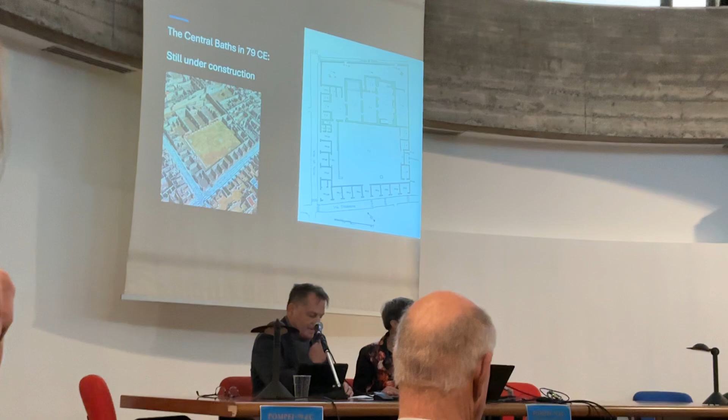Disaster. We propose here today a timeline of the Central Baths building projects in relation to seasonal work in the world of Roman construction. We seek to combine archaeological evidence from the baths with snippets of information from other source material, written sources that reveal ancient know-how and building practices. Admittedly, these snippets are few and somewhat dispersed across time and region.

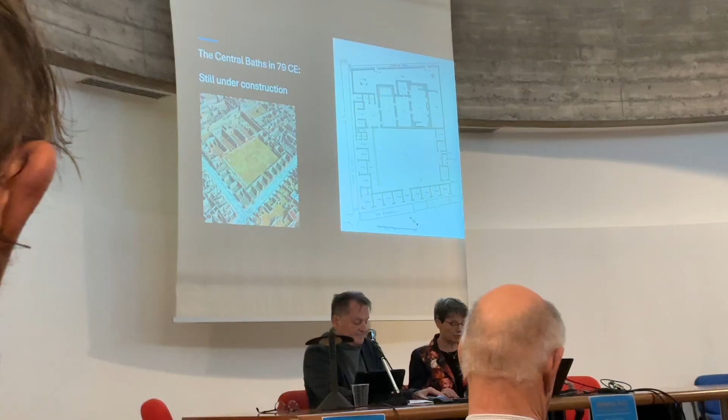Still, the idea to have a closer look at building activities going on in Pompeii in 79 and to relate these activities to the moment of the eruption is new and worth a try. In any case, it is an approach that has remained untested so far, and we look forward to discussing our ideas with you afterwards. The line of argumentation unfolds in 5 parts.

First, we will briefly present and discuss the status of the building project in 79 CE and outline some of the main principles and hypotheses, all based on the analyses of the baths published in our recent monograph. Second, we will discuss the sequence of the building activities and establish what remained to be done when Mount Vesuvius erupted and put an end to all activities in Pompeii, including the building of the central baths.

Third, we will discuss some written sources that shed light on building practices and that seem to reflect Roman ideas about seasonal building activities. Fourth, we will identify some possible clues and detail how this archaeological evidence from the central baths might help to narrow down a bit the period in which the eruption took place, a time span now ranging from August to

well into November. Fifth and finally, we propose a timeline for the building of the central baths and connect this timeline to possible dates for the eruption, concluding with a suggestion for the period that seems to us the most plausible one. First, however, and as a conclusion of this brief introduction, it is important to underline the fact that the second half of the 1st century CE was crucial for the further development of Roman baths and bathing culture.

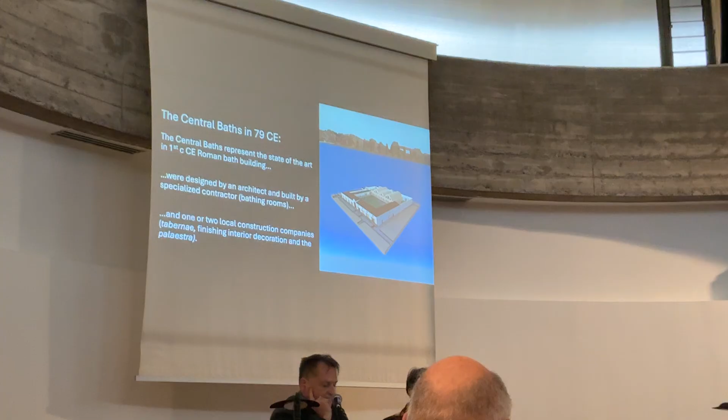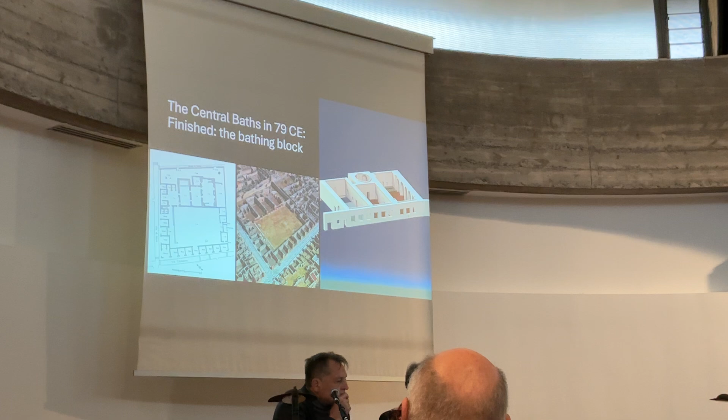In any case, the skills and experience that were needed to design and build these state-of-the-art bathing rooms, notably the heated rooms, allow for the assumption that a construction company specializing in the building of baths was hired to perform this part of the project. Other work in and around Insula 4, such as the building and finishing of the tabernae, the portico surrounding the palaestra, and the interior decoration of the rooms, could be carried out by 1 or 2 local building companies.

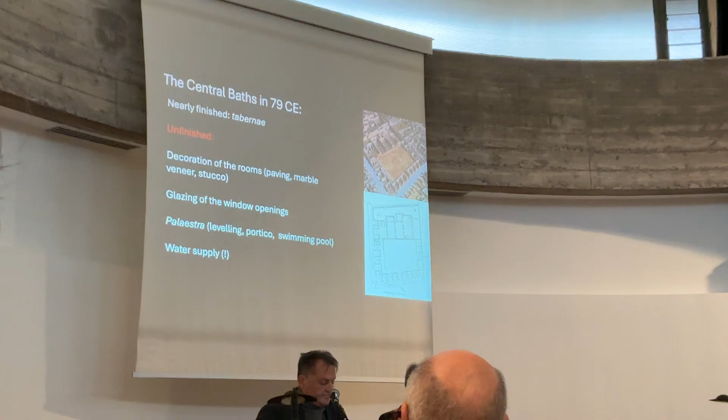All evidence from the building points to rational and deliberate planning of construction activities and a well-considered sequence of work that should prevent delays. Roman builders were well aware of the constraints and possibilities that various building materials represented. Reading Vitruvius' ideas on the different qualities of stone, sand and wood in Book 2, for example, clearly shows the importance of picking the right materials for different kinds of building projects.

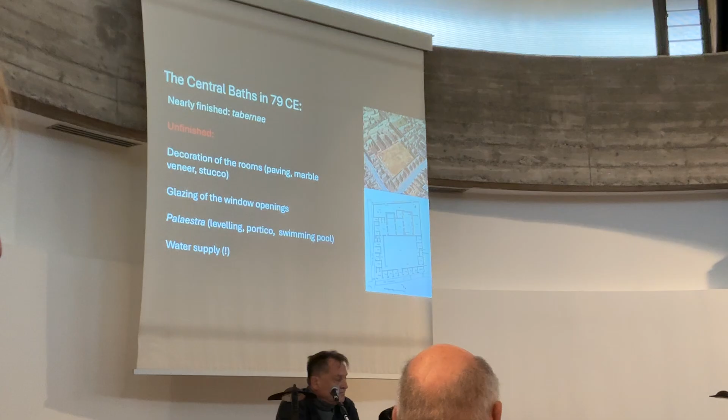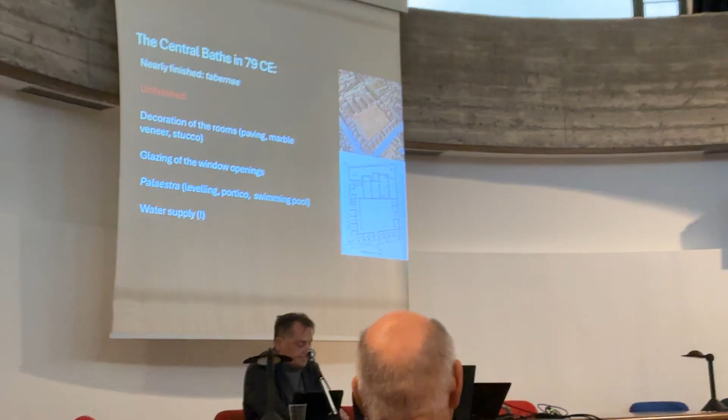We may assume that experienced builders hired for expensive prestige projects, such as the central baths, possess this kind of know-how. Moreover, passages in Vitruvius' work and recommendations by other writers, such as Faventinus and Palladius, reveal a high degree of rational planning. With a closer look at the central baths, it is possible to detect such rational and careful planning of the work in the building. Evidence points at a series of well-considered steps that allowed for an efficient and hence cost-reducing sequence of work during the phases of construction and finishing the building.

The sequence. At the time of the eruption, the rough construction of the bathing block

Can you hear me? Yes. I say it in Latin, not in English, frigidarium, huh? It's okay?

was completed. All standing walls of the apodyterium, the frigidarium, tepidarium and caldarium were finished. The barrel vaults of the frigidarium, tepidarium and caldarium, as well as the dome of the sudatorium, had been constructed as well. Nowadays, hardly anything is left of these walls. The excavators found the debris of the walls with a thick layer of lapilli on top of the collapsed walls, as was reported by both Giuseppe Fiorelli and August Mau in the late 1870s.

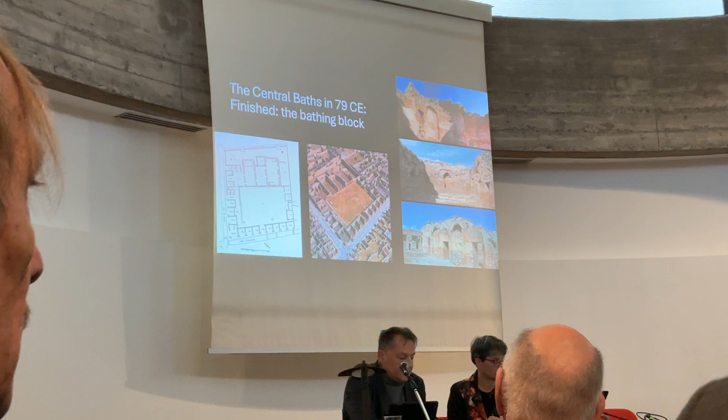The weight of the collapsing concrete walls damaged the hypocaust. Test trenches along the south and north wall of the tepidarium revealed that the hypocaust in this room had been completely installed, just as the tubuli for wall heating. It became also clear that the damaged wall and hypocaust in the tepidarium resulted from the eruption.

Oh, I need my... sorry.

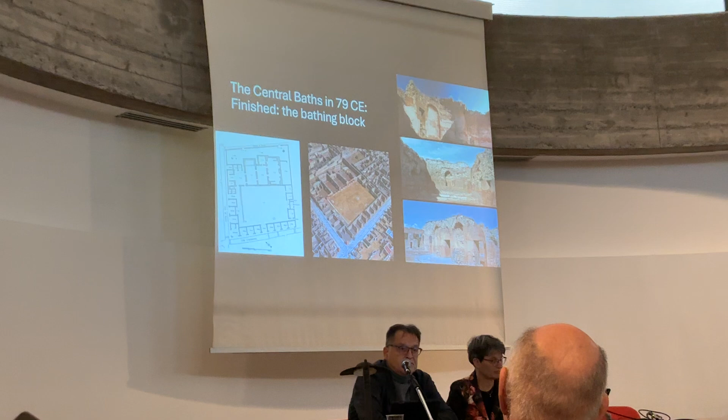Because we found lapilli in the lowest strata of the excavation trenches. Fragments of rectangular tegulae mammatae in the excavation trenches point at heated vaults, a novelty dating to the late Neronian period. The excavators removed the debris of the walls in all 4 bathing rooms without noticing such details.

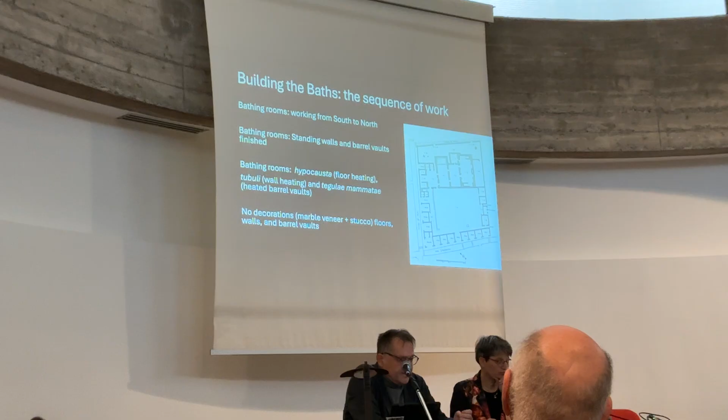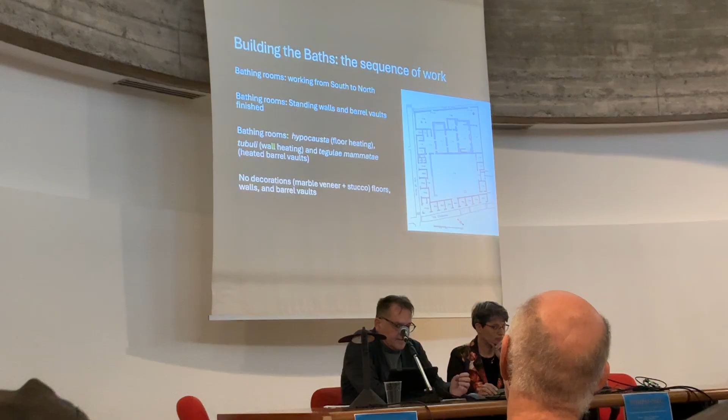Given the fact that all heating installations were completed in the tepidarium and supported by the archaeological evidence of the caldarium and the sudatorium, we may conclude that the construction company responsible for the bathing block was more or less done. Working from the back to the front, that is from the south to the north, all heated rooms were provided with hypocaust and wall heating. The 2 pools of the caldarium and the one of the frigidarium, all 3 in masonry and lined with opus signinum, were also completed.

The drains of the pools were also placed to facilitate the work of plumbers who had to arrange the water supply to and within the bathing rooms. The discharge of the wastewater was partially finished on the east side of the tepidarium in the service area by a channel that would direct the wastewater to the back street, the Vicolo di Tesmo. The water that eventually would have drained into the sewage system of the public latrine was under construction in the area to the west of the bathing rooms.

The summary of the evidence so far makes clear that the work carried out by the specialized workforce, the bath builders, had mostly been done. The following activities remain to be done. First of all, interior decoration of the rooms, probably with marble veneer for the floors, pools, and lower parts of the walls. The slabs of colored marble found in the palestra point to this type of decor and are another key for the intended grandeur and sense of luxury of the baths, if they had been completed.

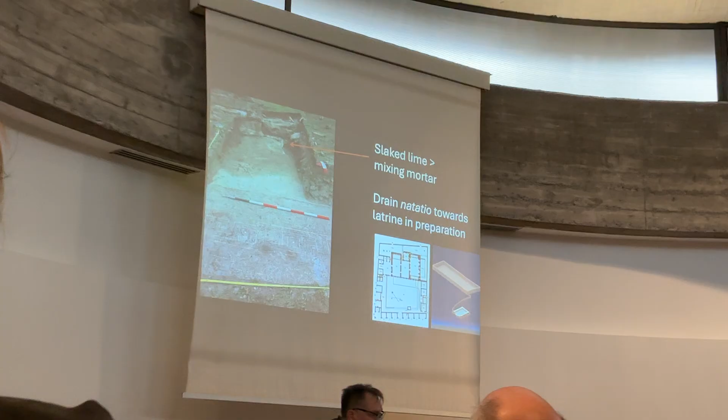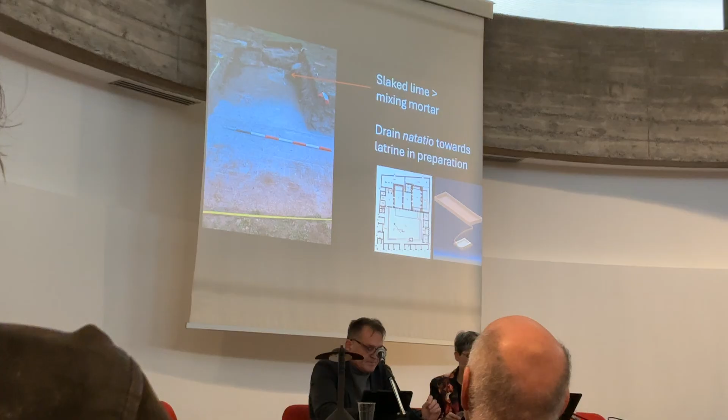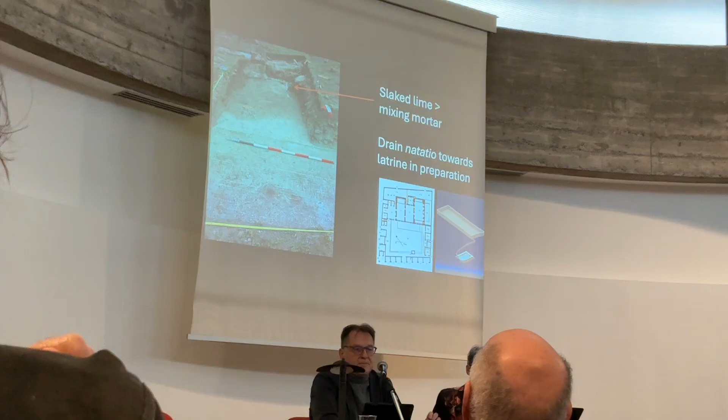The channel for the discharge of water in the southern part of the palestra was in its initial stage. We were able to retrace the foundation layer here in one of the trenches. The same trench revealed the function of the basin at the west side of the palestra, a reused impluvium from a former atrium house, probably out of the 2nd century before Christ.

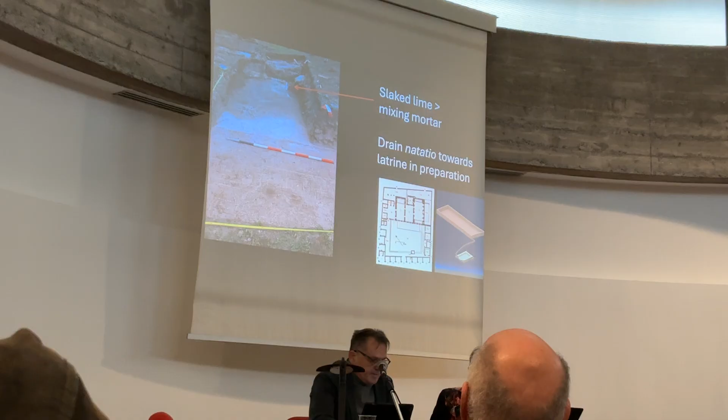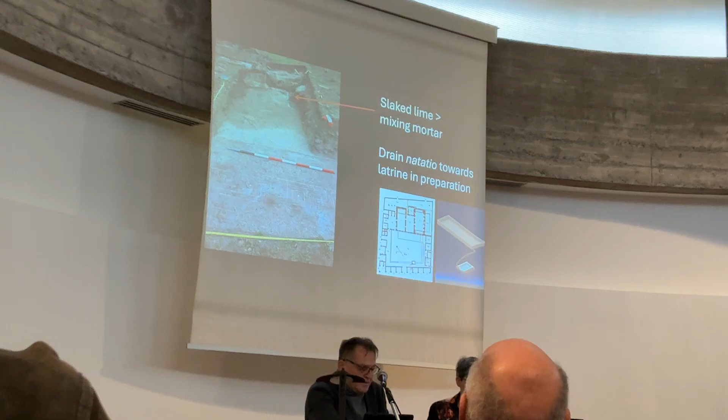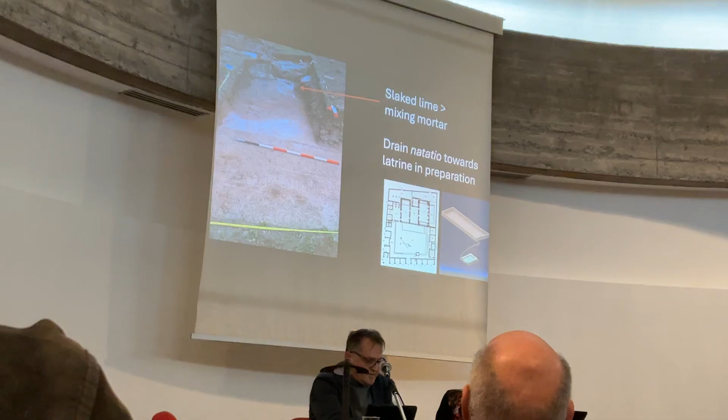This impluvium was served with provisional water supply for the building activities that were still going on, notably in the palestra itself. In the final stage of the building project, shortly before the delivery and opening of the bath, the basin would have been demolished and the southwest area of the palestra would have been leveled, that is, after the completion of the discharge channel towards the latrine.

The final leveling was relatively easy. After all, the construction of the outdoor swimming pool, the natatio, at the east side had just begun. The cavity was excavated and the first layer of lava caementicium was put in place. Both Fiorelli and Mau mention the heap of sand next to the cavity, sand that was not removed away from the building site, but was meant to level the southwestern part, an area sloping down quite steeply because of the natural slope here. Trenches revealed the outer corners of the natatio and furthermore showed the foundation layer.

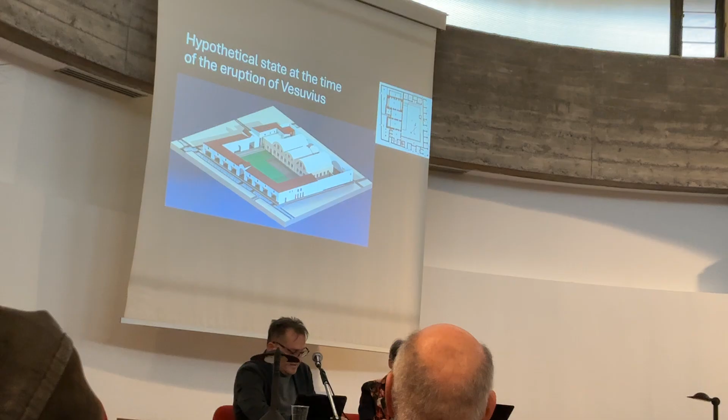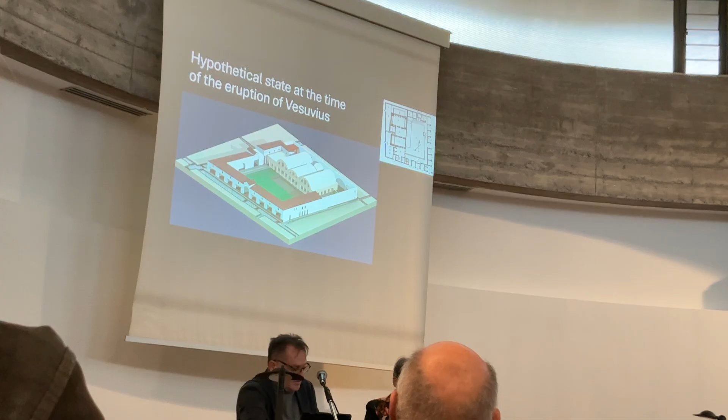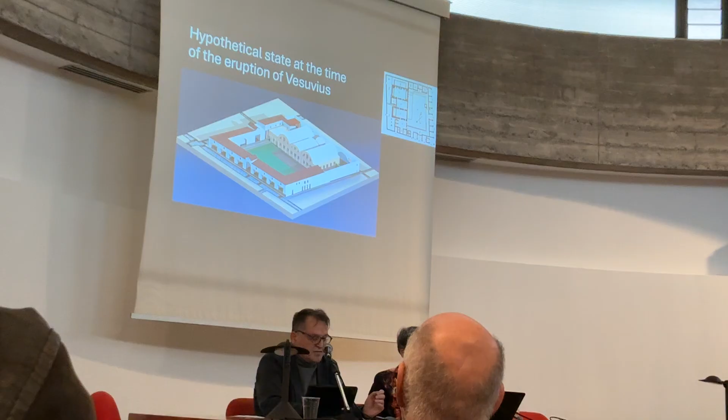The walls in caementicium had not been built yet. The underground channel in concrete that eventually would have led the overflow water from the natatio to the latrine had to be finished as well. In conclusion of this part of the analysis, the work that remained to be done could also be executed by local workmen, not specialized in the building of baths or the technical installations for heating that were part and parcel of building bathing establishments. Finally, most of the remaining work seems to have been less dependent on the time of the year and specific weather conditions such as frost and excessive rainfall. The exception to this, however, was the water supply.

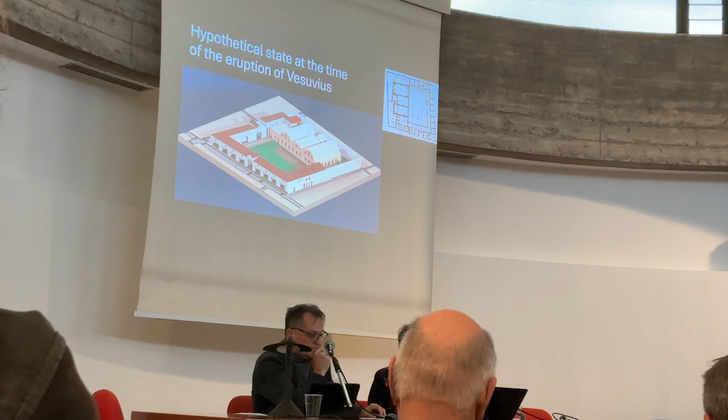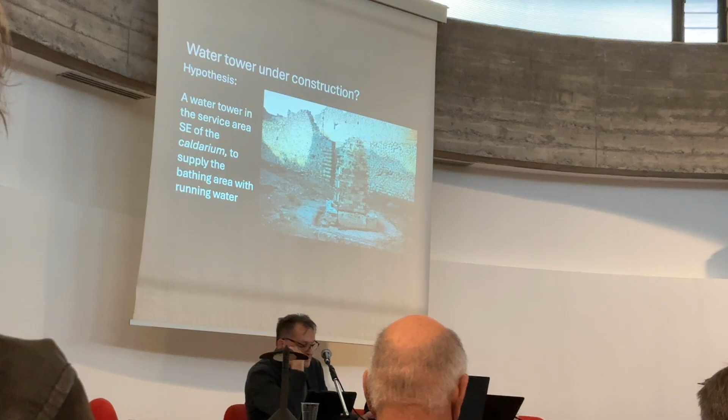The urban water system underwent major renovations at the time of the eruption as well. The baths were still awaiting a connection to the new urban water system under construction. We hypothesized in an earlier contribution that the baths would have had their own water tower to cater the high demand for water in the bathing rooms. Possibly a connection to the recently excavated water tower near Insula 2 in Region 5 was in the planning, but that remains a hypothesis as well.

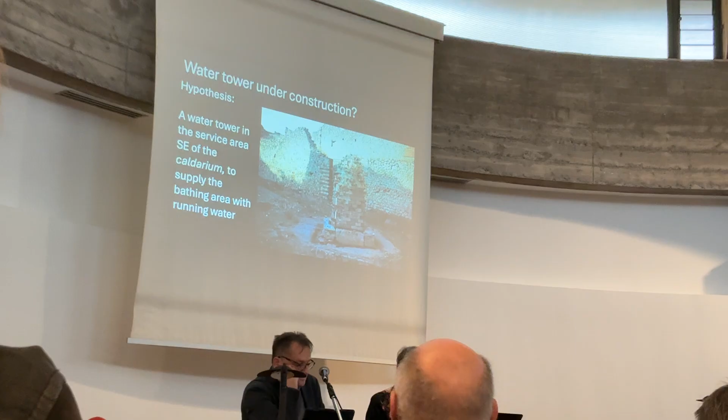But the urban water system and the inner water distribution, that is the supply of the pools and labra with water, could have been carried out by local plumbers, possibly in close collaboration with an imperial workforce responsible for the renovation and maintenance of the Campanian aqueduct, the Aqua Augusta. Openings in the lower zone of the niches indicate the locations for the lead pipes, the fistulae, and as already mentioned, this preparative work by the specialized bath builders facilitated the work of the plumbers that remained to be done.

Work on the water supply outside and inside Pompeii takes us now to the heart of the matter. Written evidence points at the notion of a preferred building season. Frontinus is very explicit on this matter. In his treatise on the aqueduct supplying the city of Rome, he mentions the period from April to November as the most suitable period for building. The most suitable time for masonry work is from April 1 to November 1.

Moreover, he recommends avoiding building in opus caementicium during the heat of summer, because moderate weather is necessary for the masonry properly to absorb the mortar and to solidify into one compact mass. For excessive heat of the sun is no less destructive than frost to masonry. Unquote. Frontinus is an interesting source here because his text is contemporaneous, only slightly later than the last phase of Pompeii. Moreover, his ideas seem to reflect the know-how and practice of his time.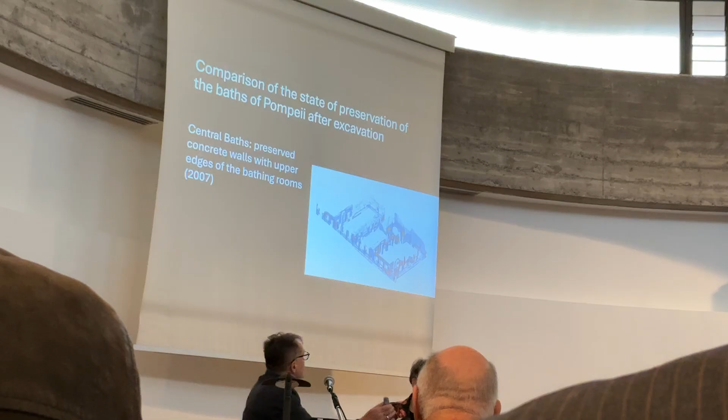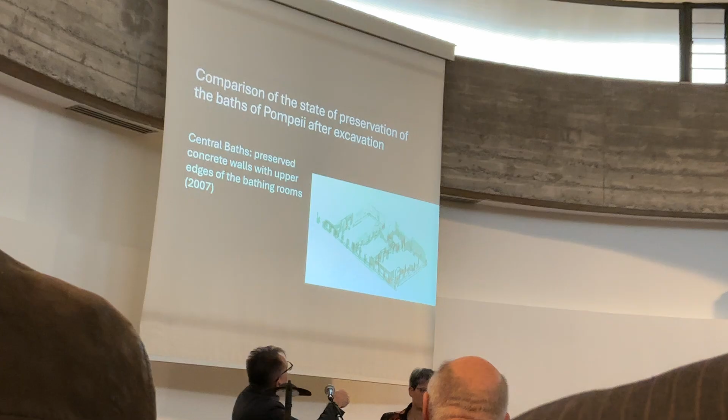This is the situation we found in the central bath, the bathing complex, and this is the original situation of the upper parts of the walls preserved. And here, as an example, we have the frigidarium with only a little trace of a wall, this one. And this is the only part that has survived this eruption. And another part is this one, in the sudatorium in this room.

And this is a very dangerous room because it was hit by a bomb during a bomb raid in the Second World War. It was maybe the most important room in our bath. It's the one that was hit by a bomb. So we have an exact date for this.

So, modern research, for example by Heinz Otto Lamprecht and more recently by Lynn Lancaster, has shown that it took months, if not longer, for Roman concrete to reach its final strength. The processes of binding of the mortar and the hardening of the concrete took more time than is the case nowadays with modern concrete. In other words, the walls were still fresh and simply not strong enough to withstand the earthquake that had preceded and accompanied the major explosion of the volcano.

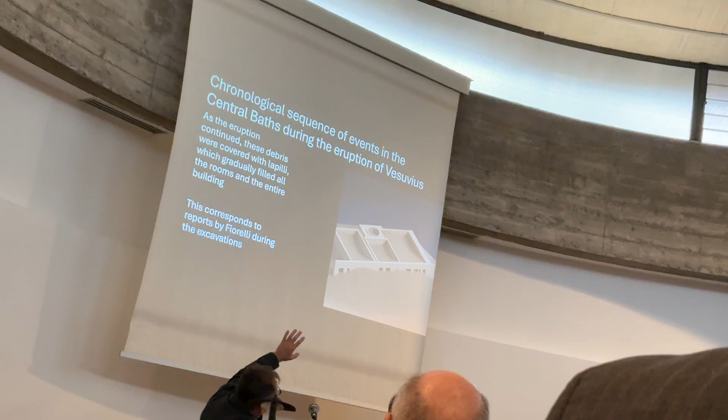And in the next phase of the eruption, the central bath looked like this. Every roof was away, the walls were collapsed. And then they were filled with this lapilli. And this is how it should have looked.

The second aspect that provides us with possible chronological clues is the water supply. Apart from the provisional water supply, the final and permanent connection to the urban supply system was still lacking. As mentioned before, the urban water system in Pompeii underwent major renovations at the time of the eruption. If we take Frontinus's words seriously, at least part of that work was not carried out during the summer heat. We must be cautious here, since Frontinus's text addressed the city of Rome exclusively. Still, his more general remark on the need for pauses during the heat of the summer is of importance here, whereon the urban water supply had just started again.

If we return to the works that remain to be done in the central baths, the only parts for which building in opus caementicium was still necessary are the construction of the natatio, the drain towards the latrine, and possibly the water tower under construction in the south of the bath. Hence, this was the last part of the buildings that had to be finished before the start of winter, before the 1st of November, if we keep that date from the written sources as a guideline. That is the deadline for building in concrete.